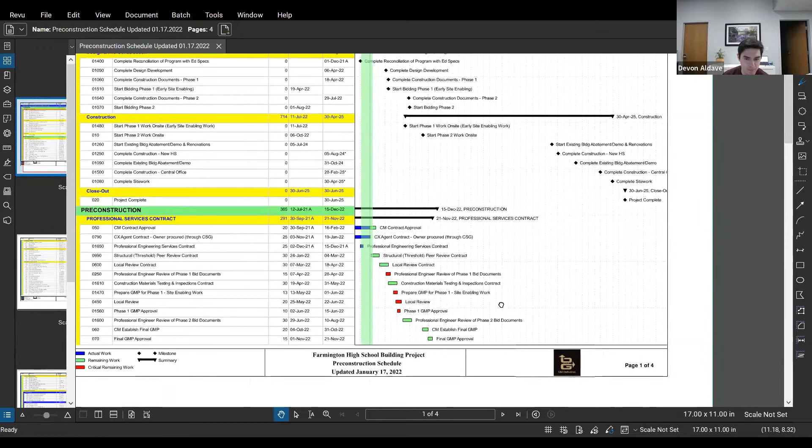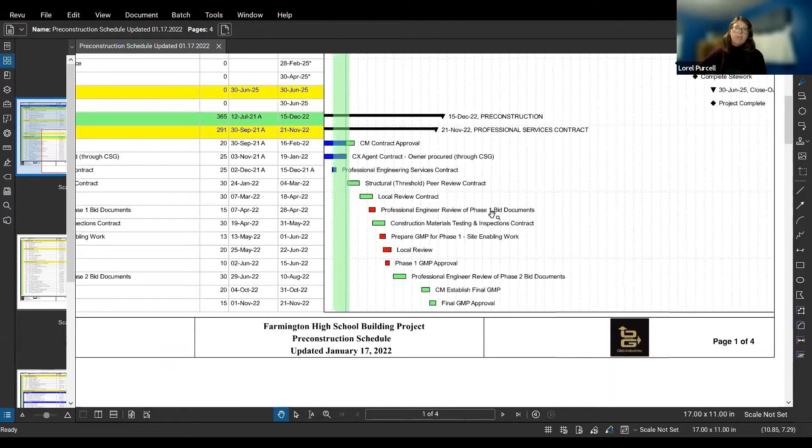So we have our pre-construction schedule update as of January 17th. And as I had mentioned at our last meeting, I will be providing updates to these on a monthly basis.

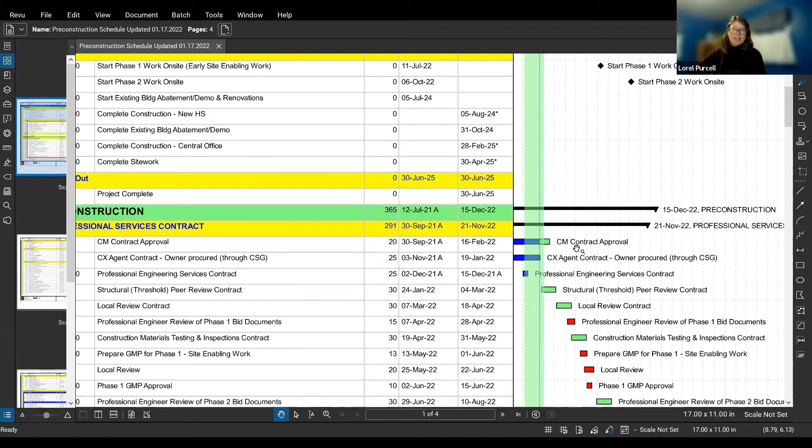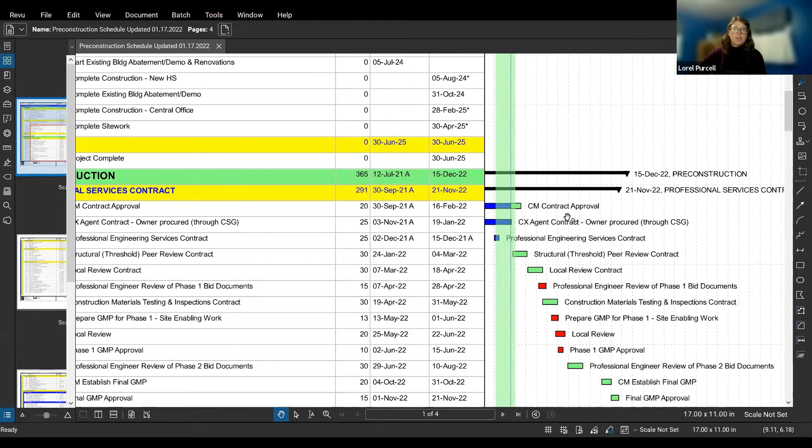The CM contract approval, I bumped that off to February, not knowing when that was going to end. It's still been lagging, so just keeping track of that. As mentioned before, the commissioning agent is being presented tonight. So I'm showing that we're approving it tonight, but who knows? The professional engineering services contract has been approved.

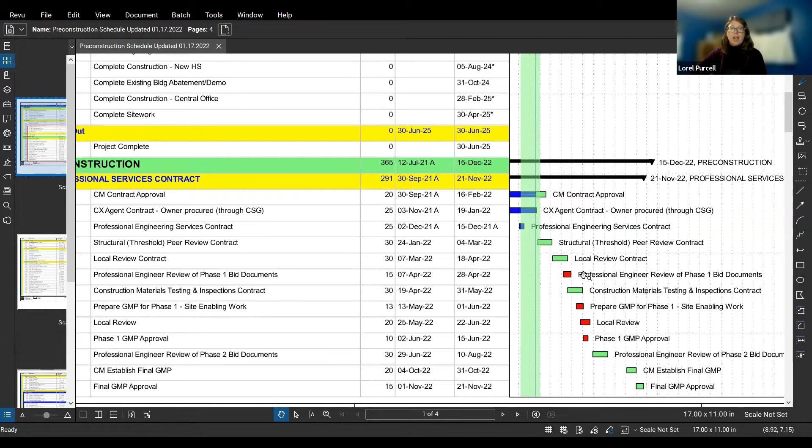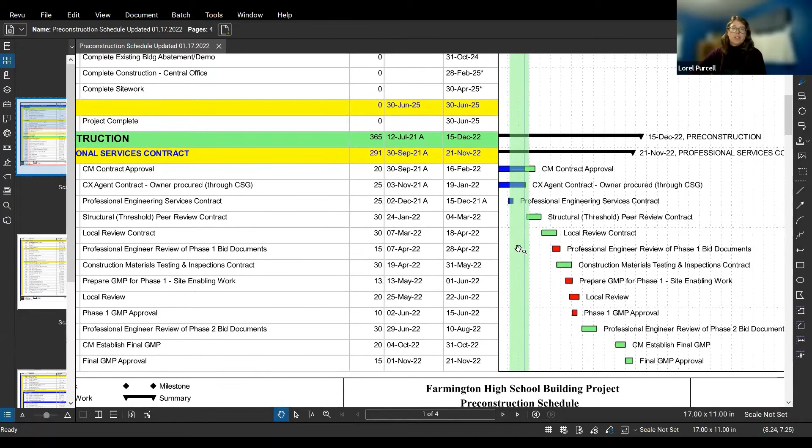And you will see, as Mark had mentioned from CSG, we've got more contracts that will be worked on. So the next one will be the peer review contract, followed by a local review contract. Those are the next contracts you as a building committee will start to see over the upcoming time frame. Again, this is reflecting through the beginning of February, just to let you know what's up and coming for tasks.

On the next page, the SD presentation, since it's on the agenda, I'm still carrying this forward. In the meantime, Tai-Soo Kim has proceeded on with design development, so that's a very critical time frame here. This end of February, they need to stop drawing, and then we need to start doing our next estimate. That's something very critical to stay on target with where we are.

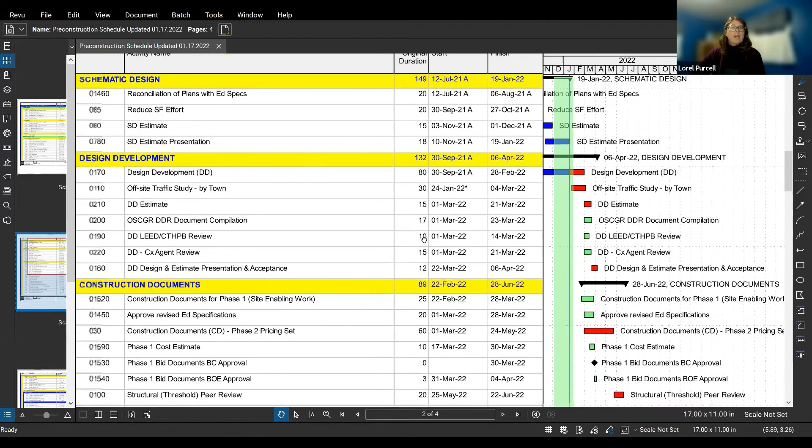I forgot to mention at the beginning, we are still on schedule, but we are coming up to some critical time frames. Also, something we kept track of and will start following up with the town is an offsite traffic study that the town will be conducting. We want to start tracking that as well, because that will affect our OSTA submission.

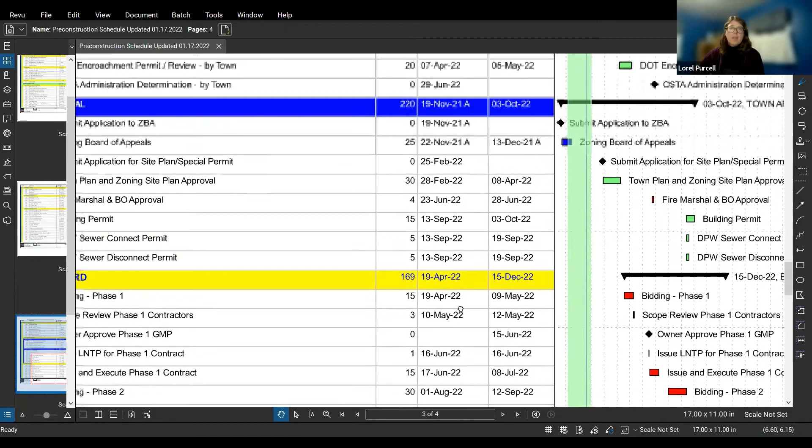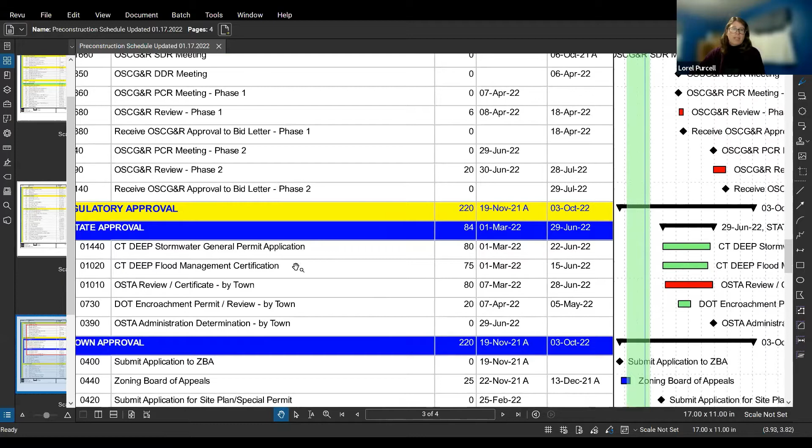Let's see what else is up and coming. We had mentioned with Bob Selmer, when we were looking to see him next with these PCR meetings, DDR meetings, so they know we're going to be going up there sometime in April. Kind of coming up soon are our applications for DEEP. I don't know if we need flood management, but for the stormwater, those are things we'll start to track.

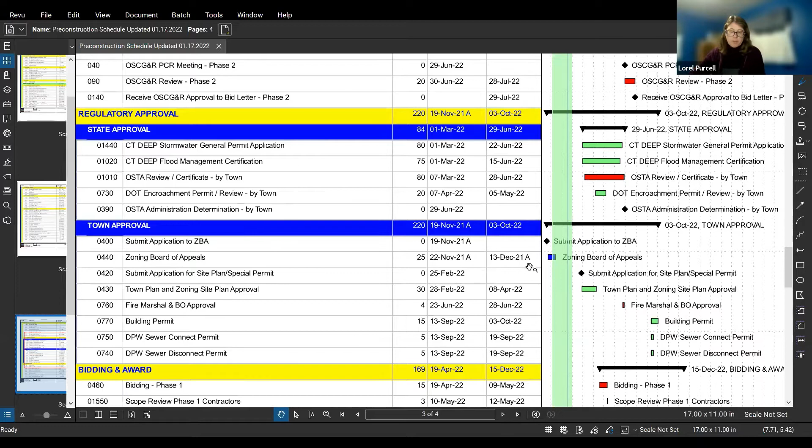For Zoning Board of Appeals, that did get approved. Let's see what happened with that. That was on the 13th. There was a hearing and a decision was made, and we just need Kat's office to verify that she's received formal notice of the decision. So we've made it to— go ahead. I have received formal notice. Perfect, so that's good, that's behind us.

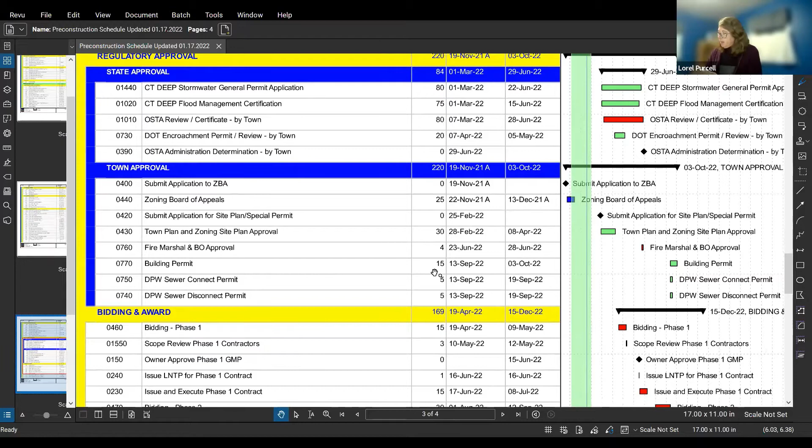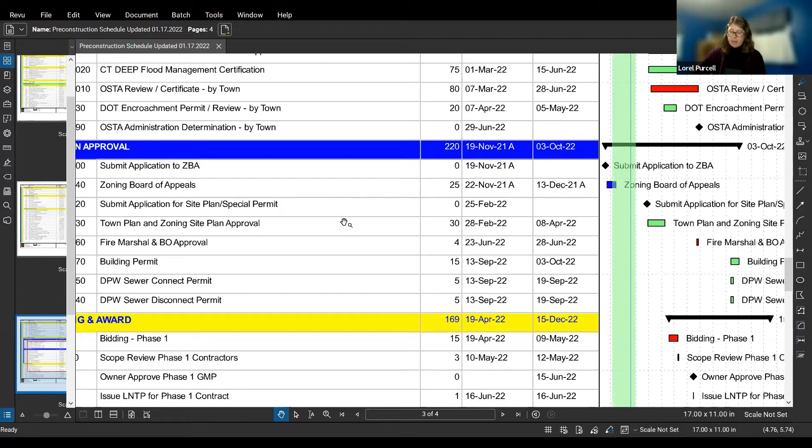Let's see what else we've got. As Richard mentioned, getting ready to prepare this site plan special permit—he has the 23rd, I have the 25th. It's somewhere in that time frame, but that's next up because it's about a month away, and that's also critical for our timeline. Making sure we stay on for that, and this is very critical, as Richard mentioned, that we get a hold of the town planner and figure out what those requirements are so we stay ahead of that. So that is underway.

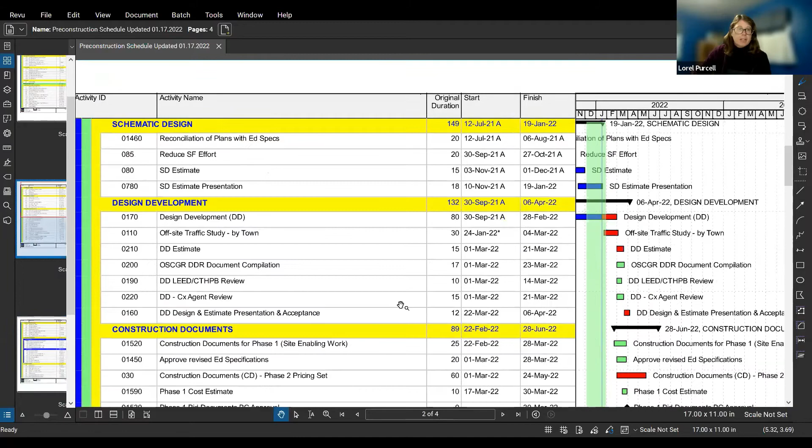And what else is coming up? I think that's about it. Oh, one more thing I breezed over because there's nothing after bidding and award—back on construction documents, and we're going to be talking about this tonight as well, is the enabling phase and what we need to do. So just a heads up, about a month from now.

Tai Soo Kim needs to be able to start working on construction documents, and there's work to be done before they can start that. So tonight we'll be talking about this enabling work and if that's going to proceed. But if we're going to be doing that this summer, we need to get started with those construction documents. So again, just to reiterate, we're still on schedule and we're monitoring these activities. And I'm pretty much done with my report.

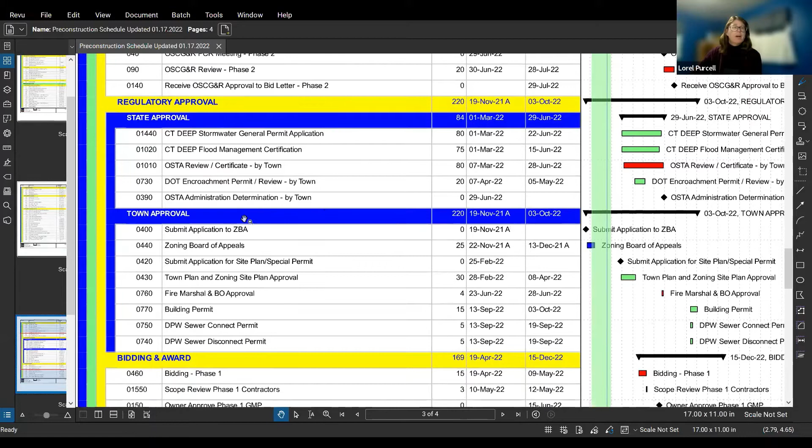OSTA is the Office of State Traffic Administration, I believe. They are a state agency that is notorious at this point for holding things up, so we know it's a critical item.

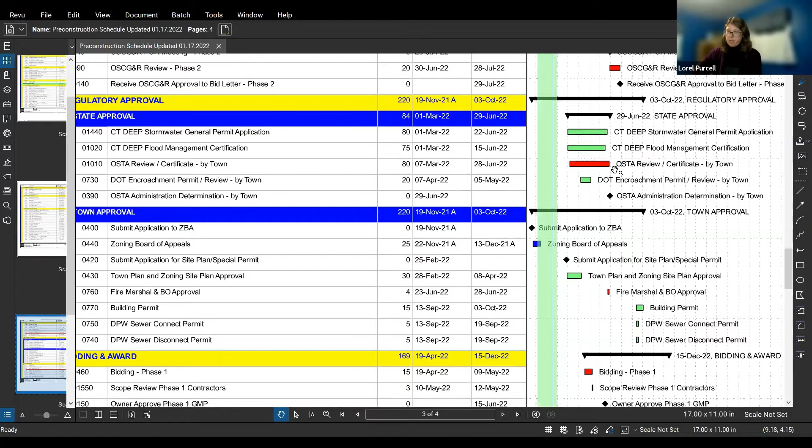It's on the checklist with OSCG&R, that's Bob Selmer's office. It's required for bidding and awarding of contracts and all that. So it's one of those reviews, checkboxes, that we need to keep track of.

The state reviews the traffic. There's a traffic study that's done, identifies cars in and out, if the project will impact more traffic.

In this case, we don't anticipate, because the number of parking spaces or individuals attending the school or staff in that area isn't growing to a number we'd expect would ultimately affect

a new traffic impact on state highway work. So we hope that's a smooth process with the state.

For example, if they were to build a new shopping mall right there that was going to impact offices, or a new residential community that was going to impact the number of cars going back and forth, then I think we would have a bigger concern.

But Lorel is correct that it is a process and it does take time, so we want to get in and out of that process as soon as possible.

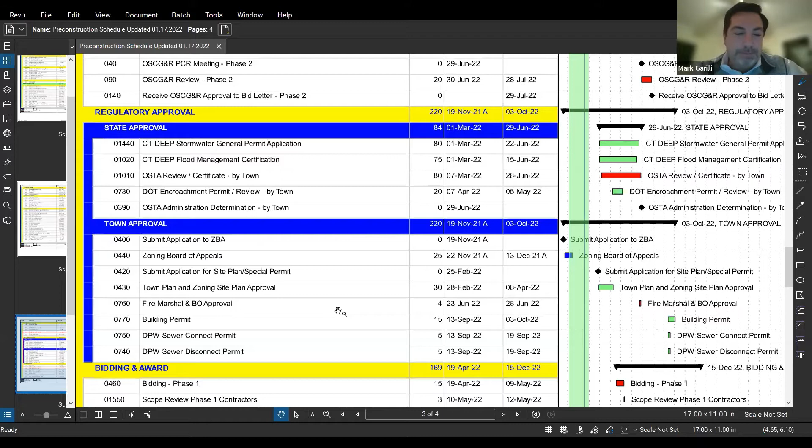Great, thank you. Any additional questions for Lorel on schedule? And please let me know if I went through it too fast, I'll slow down next time. I was trying to keep everybody interested.

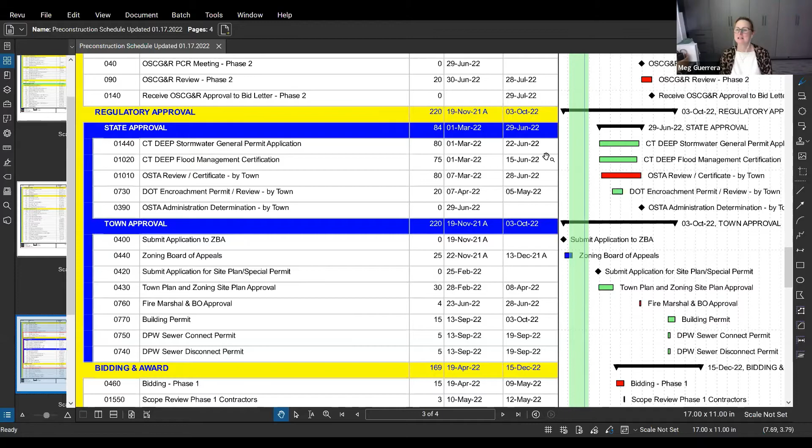Alright, anything else, Jeff? Anything you need to add within the CM report? Are you good? No, I'm good, Nick. Thanks, all right, perfect.

Excellent, we're going to move on to our final reports here. Next is F7, the Communications Subcommittee report. Kat, do you want to handle that one?

Sure, so the communications subcommittee met just before this meeting. We worked with IRA to finalize our outreach plan moving forward.

We had talked about earlier doing some Zoom public meetings, just an opportunity to check in with the public, let them know what the progress of the project is at various checkpoints.

So we are planning for a Zoom public outreach meeting in February and another one in May. We think the February one will be more about the process, where we are, what we've done since the referendum passed.

And the additional checkpoints we need to get through in order to break ground. Then the May one will be a little bit more when we have final designs.

We're talking about the site plan changes that will be occurring, presenting those to the public at that time, and offering an opportunity for Q&A.

Those will be aligned with additional newsletters going out to spread the word about the progress, a Q&A section, and then inform them of these upcoming meetings.

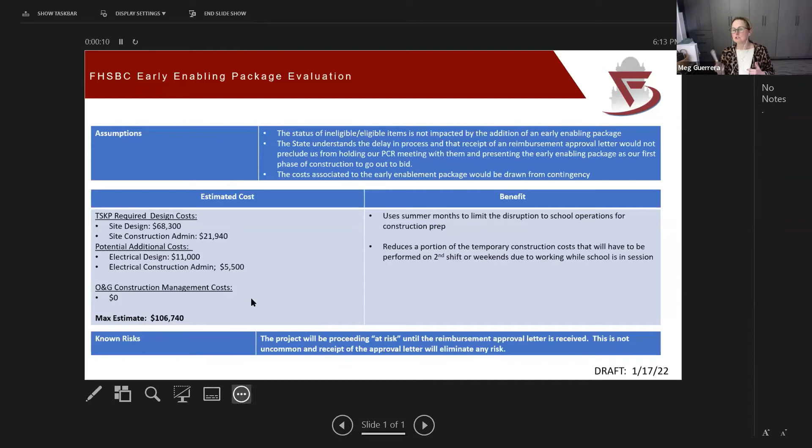So what I wanted to start with, Devin, if we could pull up that slide, just to give people a little context and some quick hit information to help us guide the conversation on how we want to move forward on this decision, because it's something we have to do sooner rather than later. So as a general point of conversation, I'm going to open this back up to Richard, Mark, and Lorel as well to provide any additional context I'm going to miss here, to make sure the building committee has a good understanding of everything we're going to talk about tonight.

But when we're talking about that early enabling package and moving that work forward, there's a couple of assumptions here we need to keep in mind. The very first thing: the status of ineligible and eligible items is not impacted by the addition of an early enabling package. So we don't have to worry about having any conversation of, oh, if we do this, what does this mean, what are the impacts on ineligible, eligible items for reimbursement and all that. That is an assumption that we have on hand.

We've talked a lot about having conversations with the state and the scheduling around that. We see CSG has confirmed the state understands the delay in process, and that the receipt of a reimbursement approval letter would not preclude us from holding our meetings with them and presenting the early enabling package as our first phase of construction to go out to bid. So this again is just staying to state standards and process. We just want to make sure if this is something we move forward on, as far as bringing this early enabling package forward and approving it, that the state understands what we're trying to do there and the goals, and that shouldn't have any impact on our process with them.

And this is important for the building committee to understand: the costs we're talking about here when we go into estimated cost and benefit would be drawn from contingency. This is not something we budgeted out or is included in our current budget. So it would be something we'd have to consider as a draw from contingency. Keep that in the back of your mind as we're talking about this.

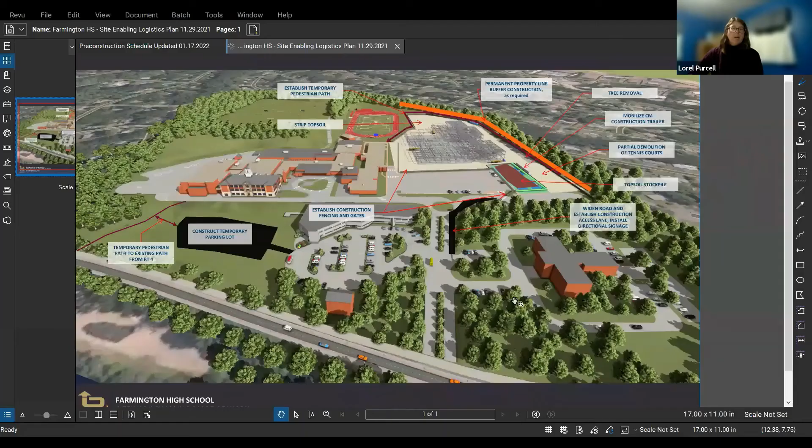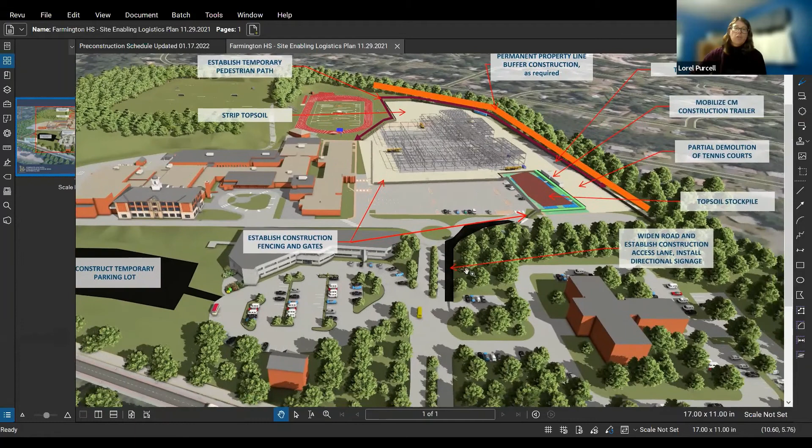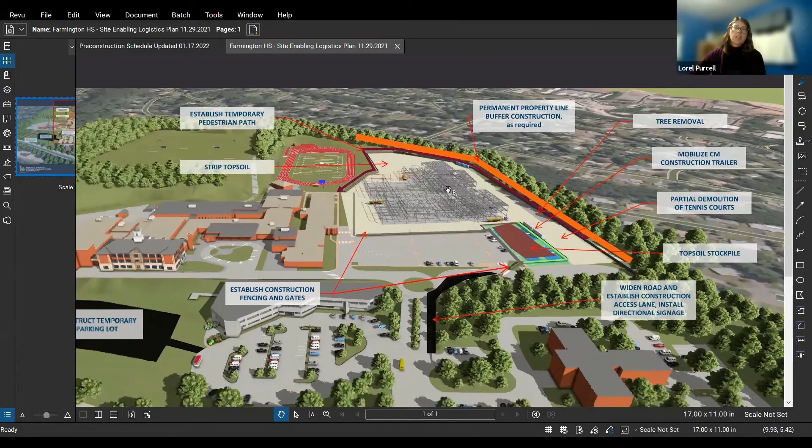Yes, Lorel. Okay, so again, just to reiterate, what we were envisioning was constructing this temporary lot with some sort of access to get to the existing sidewalk along the side of the school. We were going to do this rough grading and a temporary bituminous drive to allow for construction access with signage. We were going to put all our temporary fencing up and start stripping the topsoil. As Mark mentioned, we'll be able to store some within our staging area, but chances are we'll also be hauling it and putting it where it's needed in the end, which is where the fields will go.

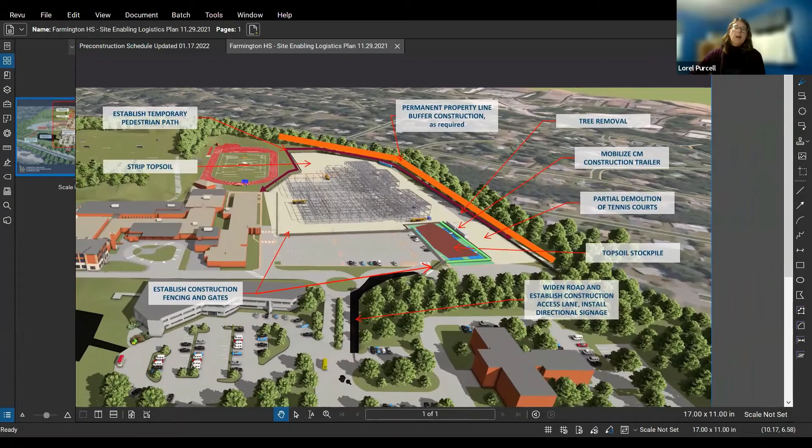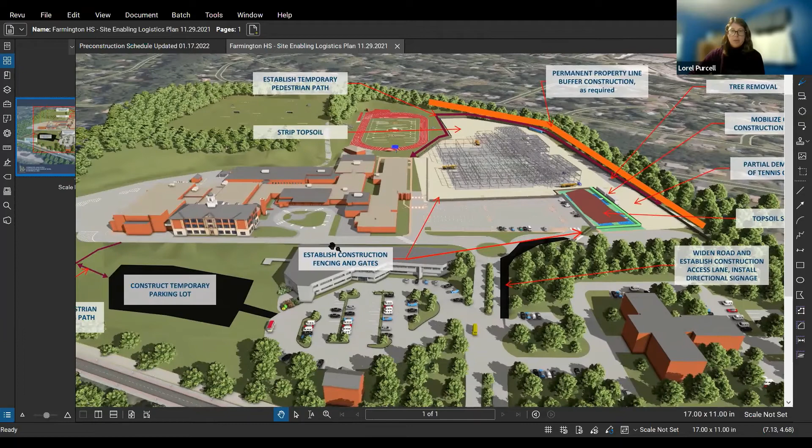That heavy equipment movement wants to be done ideally when there's no students or school traffic. One of the costs I foresee needing design for from a temporary standpoint is the traffic flow, because we're going to be interrupting the way the existing drop-off works. We really needed somebody that does traffic design to make sure that once we've cordoned off this portion of the parking lot, how is that new traffic flow going to work? We were aware the buses would continue to operate as they do now, but how is that traffic flow going to work? So in that 106, I believe, is the engineering required for figuring out how everything can move smoothly with the queuing. So that should be in there.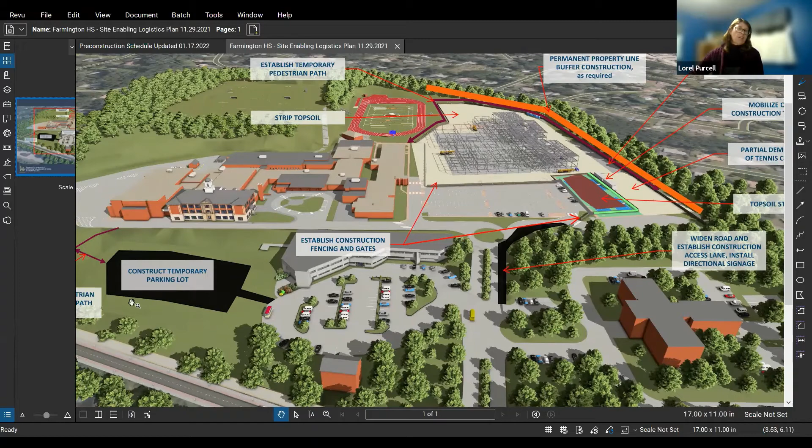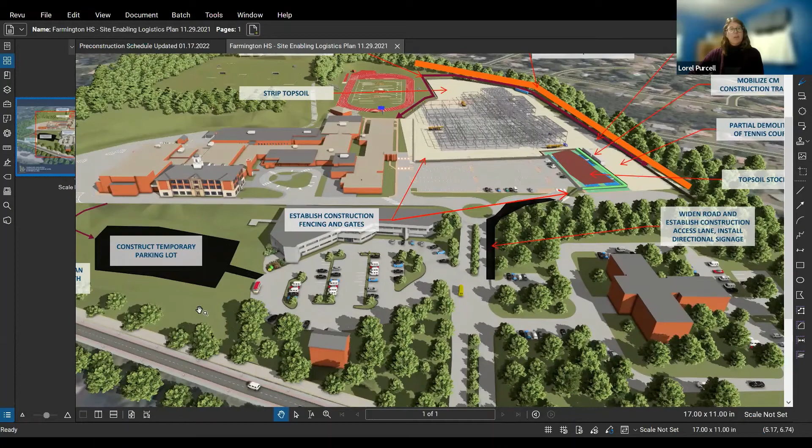If this was just a pure lot and we showed this to a contractor and said give me a lot, the contractor would probably do some rough grading and put in some asphalt. Now, if that's acceptable to the town, and if the town's not going to require storm drainage calculations or curbs, or anything from an approval standpoint, then there doesn't really need to be a design for it. But if the town is going to require some sort of design effort in order to approve this going forward, then that's where the design team is needed to provide those services.

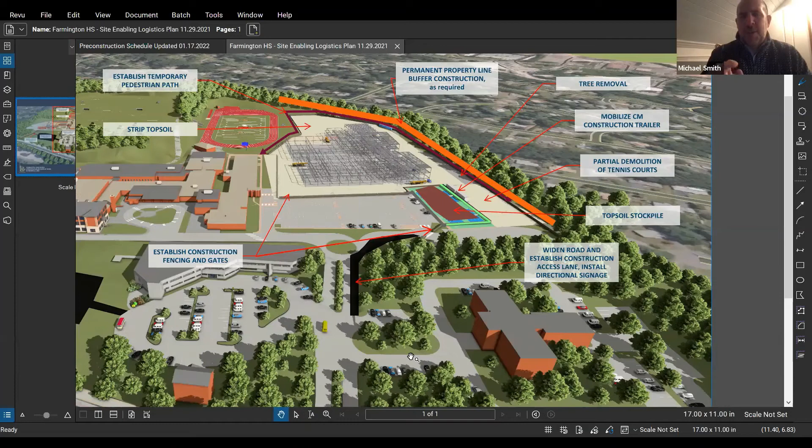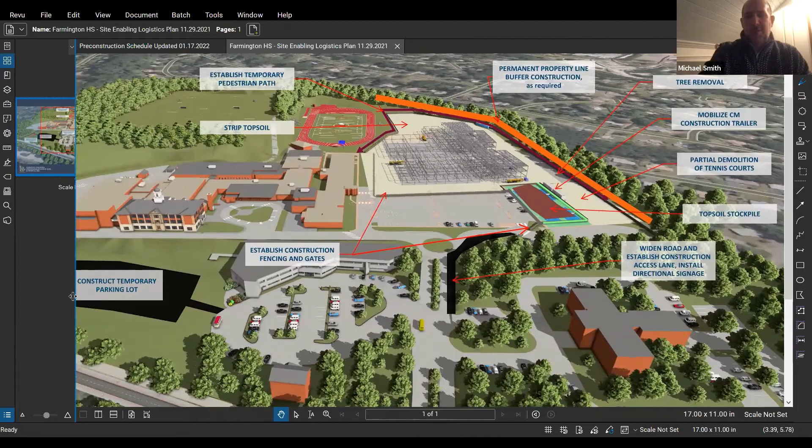So a follow-up question I have is the discussion happening tonight: as TSKP put in their original estimate to do all work, was this dogleg right for flow of parking and construction of a temporary lot ever envisioned? That was not part of the scope of services you were bidding on? No, it was not. Okay, that's what I needed to know.

So whether we do it now or later, somebody has to design that stuff if a design is required by a designer on your team. Precisely. Follow-up question: are you the right people to be doing that? This looks like site work. Would this be SLR that would do this? It could be any qualified person, it doesn't have to be our design team members. So when Lorel said the design team needs to do it, it's not our design team specifically - a design team retained by O&G can certainly do it.

Gotcha. So SLR did provide - Richard's got a piece of the oversight, but it's his landscape design firm, Richter & Cegan, and then SLR on the engineering piece. Okay, so that's part of that $60,000 or whatever we were looking at. Correct. So my apologies, because I'm clearly understanding now this is a scope of work - it's not a 'when does it happen' question, but a total scope of work that was not in the original package. Correct.

And I would like to add that you don't necessarily have to do it through us, you can hire separately. Well, as you're describing what this is related to, I'm left with the question of why not simply have the site engineers do this work? I agree, I don't think the architects need to be involved. I agree.

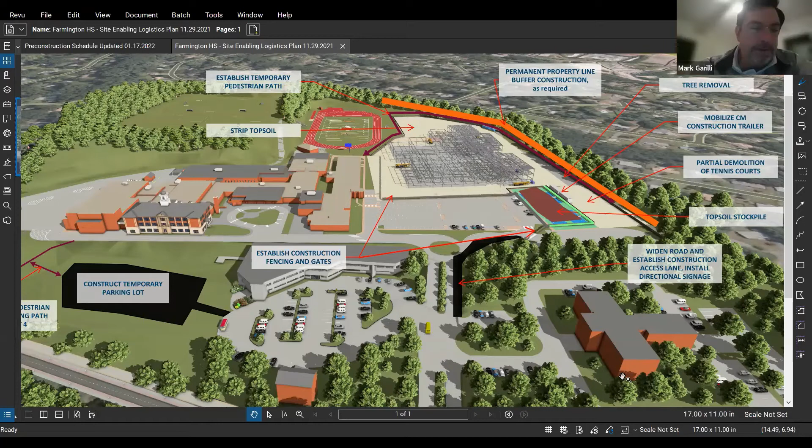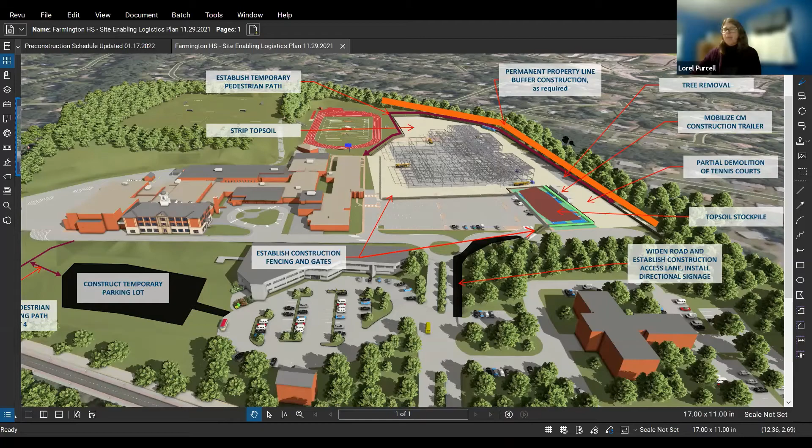Correct. Do we have a sense of what that is - do you have the SLR bid you can share with us, what portion that is? Because to me, that's what you've got to pay, whether you pay it now or later. You want me to stop sharing? I think that was in the packet, but maybe not. It is, yeah, it's in the agenda packet.

In the meantime, Chris, I know you had your hand up, Chris Fagan. Yeah, no, a lot of this stuff has been answered, and Lorel, I was going to ask if you still had that picture so I could put this back in perspective. But maybe I'm missing stuff here - in doing what I do for a living, presenting large cases to senior management, one question they always ask is, why are we hearing about this now? It strikes me as this should have been baked into somewhere along the lines. Maybe I'm just missing it. I understand the merits of it, and it's great to do it during the summer, but it seems odd this is coming out with an additional $100,000 ticket attached to it.

If I could answer that - we were never asked to design any type of temporary features until we were asked to do that by O&G. And that typically isn't done by the design firm.